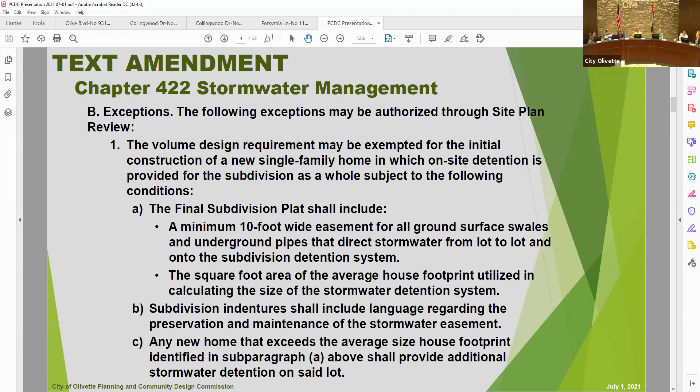Okay, any other questions or comments from the commission to our attendees? No? Anybody else have any further discussion on this item?

Carlos, any public comments related to this item? If there was anybody that would like to speak in regards to this petition application, if you can just show your hand and I'll bring you over to address the commission.

And Chairman, at this point, I don't see any. Okay, do I hear... I do have Councilman Waldman with it.

Mr. Chair, Brian Jokers, I thought I heard you ask a question that I'm not sure got answered. If you have house A and house B, and house A is under that measurable, and house B is over that measurable, can you still be okay because within 2 lots, those 2 lots together will equal a number, even though one's larger and one is smaller? Did I misunderstand what you were asking? No, that is what I was asking. If lot 1 was less than the number we set for the average, can that amount that it's less be used then on the next lot for the overage? I guess that was kind of my question. So yes, that was my question on that.

Go ahead, Karen. Missy, I think the commission's feeling on that is that keeping track of that for the total subdivision is going to be an administrative nightmare. We just have to consider each lot individually. If there's something that's slightly over, it's not going to be a big problem. If something's considerably over, then we're going to want to see some additional something to take care of that overflow. All right, so that was part of the answer to that question.

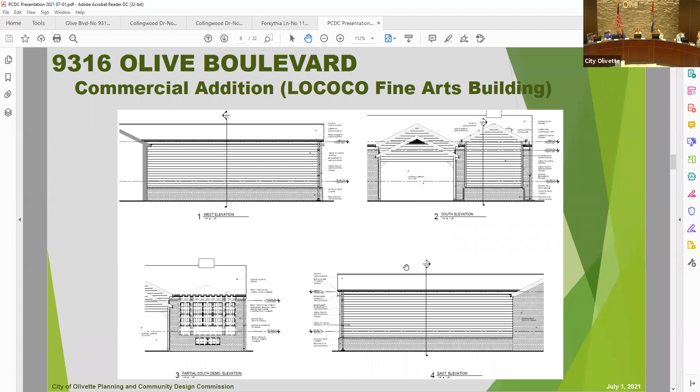You have the full sets of plans there. We've met with the assistant fire chief regarding access on the facility, along with the building inspector to talk about use and accessibility, and there are things they'll be working through in the permitting process. Outside of that, because the addition is behind a property fronting Olive and in the back of the building, staff is recommending approval as submitted. Be glad to answer any questions, and keep in mind the purpose is storage of artwork, so they're trying to minimize any exterior light from entering.

Is it going to be attached to the building? Yes, yes, so no gap there. No. Any other questions or comments?

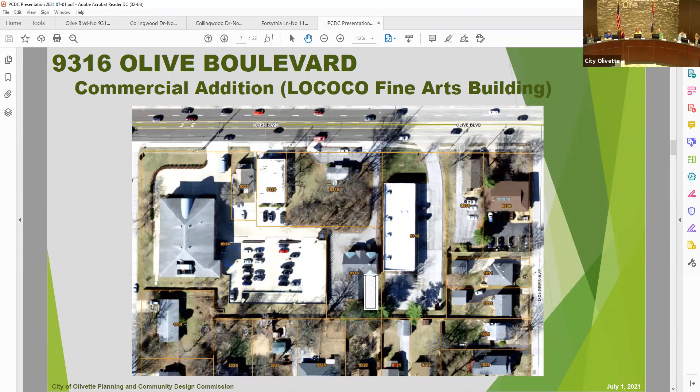I would like to motion to approve the petition for site plan, new design, and concept stormwater management plan review to authorize a 768 square foot addition as presented before the commission and noted in the memorandum from the Department of Planning and Development dated July 1, 2021, subject to staff conditions noted therein.

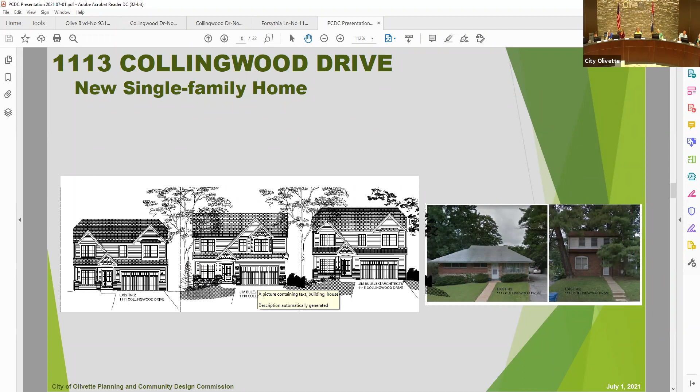Given the narrowness of these properties, the commission in the past has been flexible to allow or authorize a front entry garage as long as it's not the primary protruding portion of the home. You can see, given the property to the far left, the commission's found the design acceptable. Second is elevation articulation - looking at the side elevations, given the narrowness of the side yard setbacks, the first level on the left side elevation doesn't have any window articulation, but they try to break the building elevation with a band. Finally, if a home has less than 50% brick on a front elevation, staff has to bring that to the commission's attention for discussion and review, which this home does not require.

The last thing staff noted on this house is that there are contradictory elevations. The front elevation illustrates that the home was going to have a full hipped end, where the rear elevation shows that they're kind of clipped, and you'll see that in the next petition application. I think it was just a minor error - this one is more rectangular with corners, as opposed to having the corners cut off.

The petitioner did engage with the subdivision trustees. You have a letter of support from the trustee president, and also a letter from a resident expressing concern about the brick. Outside of that, staff doesn't have any other questions or comments. The home reflects traditionally what we've authorized or approved in the past, both for Collingwood and other narrow streets, including Cherry Tree and Harvest Lane.

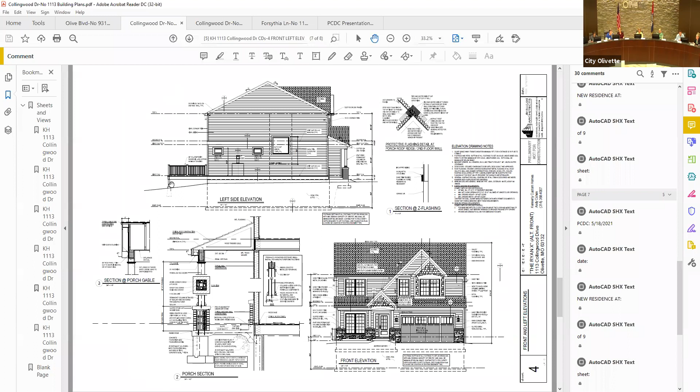Good question. Let me check real quickly if we have that information available topographically. It was kind of more pronounced when you had all the other residents' houses there. Bear with me. I think the elevation does rise as you're going down the street - the hilltop. Yes, so the elevations, the lowest elevations, and yes that is correct, because the house here at the end - there were some concerns about it being the house at the far end and the amount of future stormwater it could receive when we were doing the review on this home.

Then the only other comment I had is it just seems like all three of those houses look very similar. Are there different color changes between them, or anything that would make them a little bit more distinct from each other? I don't know if anybody else on the commission shares the same view.

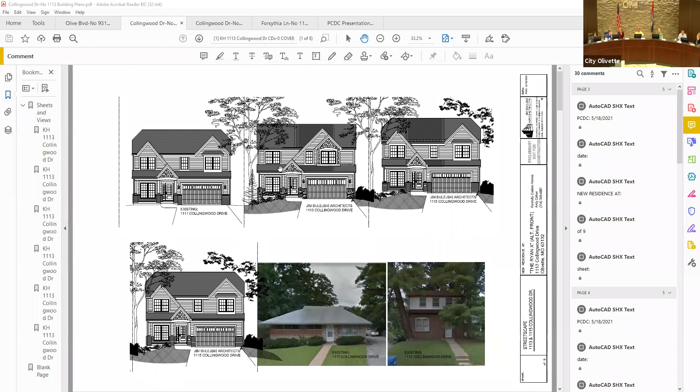I think it's a nice looking design, don't get me wrong, but I just think to have three right in a row like that, maybe it needs a little more variety.

Okay, bear with me one second. I believe you have, before you on your screens, the elevation of 111 or 1111 - that's the one at the farthest left, at the beginning of the street, second to this. There you go, sorry.

Do you know if there's any color variation between the two, or are they all using the exact same building materials? The overall material is the same. Regarding colors though, that's not information we generally take a look at in the detailed construction specs. The representative of the petitioner or one of the architects is on, and it's a question we can ask.

That'd be great. Right now, does anybody else on the commission have any questions for Carlos? Seeing none, Carlos, I think let's bring on the petitioner.

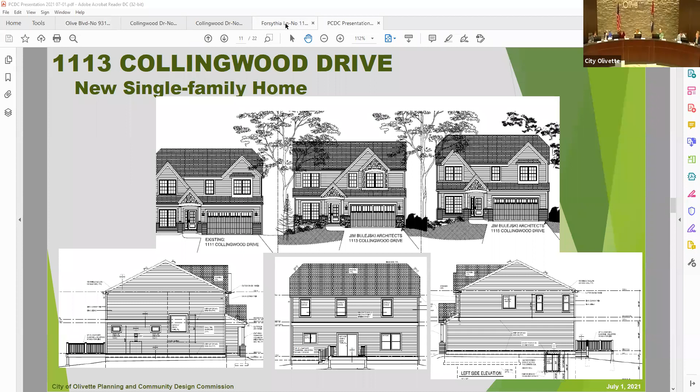Appreciate your time, Katie, thanks. Okay, we'll move on to item B, but we're also going to defer on that item because of the same issues as item A. Then we'll move on to item C, which is 11 Forsythia Lane. Mr. Chairman, I need to recuse myself on this issue. That sounds fine. Carol Wagner is recusing herself for this one, but this is a petition for a community design review for a new single-family home located at 11 Forsythia Lane.

All right, Chairman, are you set? Were we set? Yes, okay, she's good, ready. Good, good. Okay, so Carlos, are you ready?

I think I introduced it already, so if you're ready to go ahead with the report, that'd be great.

Chairman, this item was scheduled in our last commission meeting, but that was canceled. Given the excess time, we did meet with the petitioner and their architect. So the plans before you have been revised from those submitted at the June 17th meeting, which of course was not held.

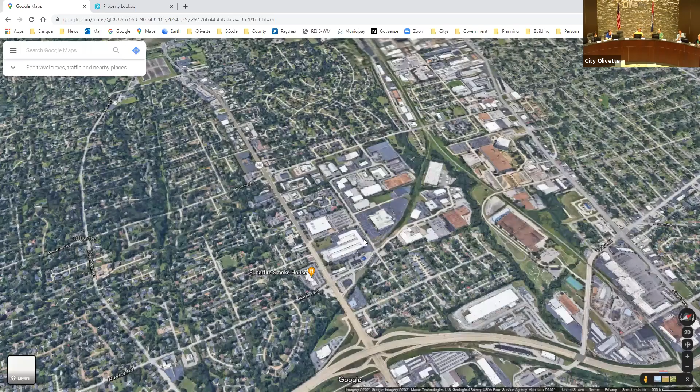There is a desire for it to be 80 feet versus, you know, 25 to 40. Seems like there was some adjustment made from this - why it desires to have such a far setback. Yeah, it's still significant, I think. I think it's a better improvement from where it was before, but I'm also a little concerned that it still stands out too far back. And the neighbors also, seems like multiple neighbors have expressed concern. Coming forward probably addresses some of it, but...

Real quickly, Mr. Spiegelglass, I think you should be able to see the little mouse pointer. This is the existing home, number 11. There's a tree that's identified in your site plan that's in the front, but back here are the 3 trees that you'll see, also reflected in their elevations here. Those 2 there, or in the renderings, I'm sorry.

I think there was a comment - if the owner had a comment that they didn't want to be on the footprint of the existing building, and concrete... I'm actually not sure I didn't quite understand it. It was something that they were afraid would potentially cause cracking in their foundation, water, really the ground. I didn't quite understand that myself.

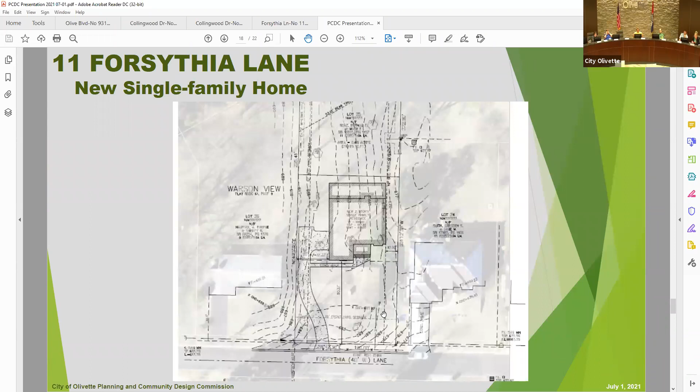That's pretty good, yeah. So you start running into issues with the driveway and whatnot being, in essence, part of the open foundation excavation, in my opinion—where if that's not the case, if you were to move this house forward, that's what you really need to look at. You can see how the driveway still allows us to get around the house.

If we move that house forward, let's call it 20 or 25 feet, part of that driveway is now over what is currently kind of an excavated area. So we're asking for concrete issues with that drive apron, which would be a bigger concern to me than maybe a cracking foundation.

But the cracking foundation—once the old house is uprooted, we'd have to do some soils testing to see what kind of bearing capacity we have, and then still engineer the soil compaction as we fill that back in. We've done so many tear-downs, and yeah, this happens all the time.

I'm not quite understanding. Tim, do you have any thoughts on this?

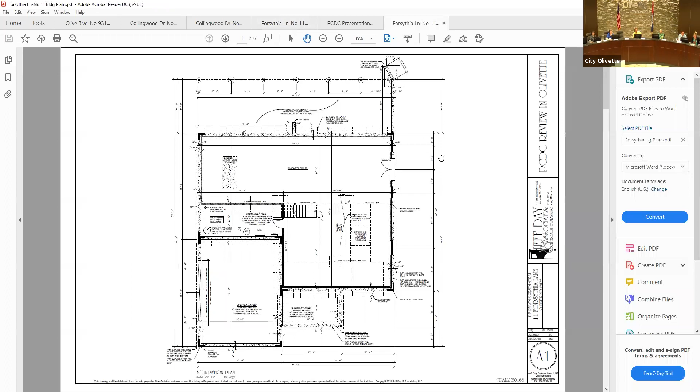There's the basement floor plan. Okay, if you could show the first floor. Okay, you guys see where the garage is located? Yes. Okay, so as we move the whole house forward, that garage is going to be over what is currently basement on the existing house.

So there's either a whole lot of backfill, which if not compacted correctly, these things start settling, or he's forced to buy pre-stressed structural hollow core slabs and have a basement under his garage, which adds, currently with COVID pricing, somewhere in the range of $30,000 to $40,000.

And so we would have to engineer the soil underneath it, as well as the engineered soil outside of that at the apron, because the garage and the drive apron falls over the basement.

So Carlos, if you wouldn't mind going back to the translucent site plan. Imagine taking that footprint, moving it forward 20 or 25 feet. And now all of that is over what is currently basement area. So it starts to exacerbate what we're trying to do, and it makes the cost of the garage pretty excessive, and the driveway at that point as well.

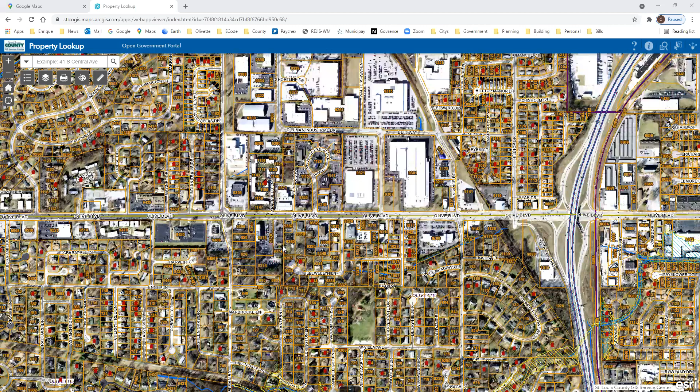One of the beautiful aspects of our subdivision design is the large area of green space we all enjoy at the rear of our properties. The subdivision indentures help keep this view in place by limiting the height of any fences within the subdivision. When I sit on my back deck, I have the pleasure of seeing a park-like area of uninterrupted green space. It is in large part what makes our neighborhood one of the prettiest in the area, in my opinion. This is not protected common ground, nor is it a public park, but it has survived since the subdivision was built in the early 1950s, because each of us has respected our neighbors and purposefully not constructed sheds to block our neighbor's view or put in fencing over 3 feet.

This new home as proposed would clearly be an obstruction for almost the entire subdivision. The house is still set back so far, it does not come close to the frontages of the other homes on the street. It does not respect anything about our neighborhood design and would be very harmful to all of us on this side of Forsythia. This is a lot of damage to a lot of homes.

As you know, I'm a professional planning consultant with 30 years of experience and have served on the city's planning commission for about 30 years. I have spent most of my career working on redevelopment projects. In all that time, working with engineers and architects, I have never heard any of them say they could not place a structure on or near the footprint of the building that was being torn down.

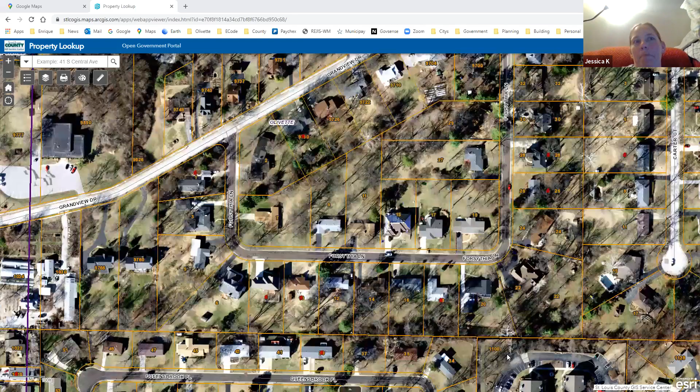Also, when I was looking at the plans Carlos brought up of the lot lines we had, of the two lot lines on the other side, David's backs up to the back 100 feet, but the other two are set back from the front 100 feet. If we build this house at this setback, number 15 and number 17 would actually have great difficulty moving back any further if they were to tear it down.

When we move it back, it really does affect the setback and the feeling of the street, because 15, 17, and 19 don't have much room to push their houses back. I know number 11 does, and number 9 could maybe move back a little, but that would set a precedent for what we have. So even an 80-foot setback will still significantly impact the view of our block.

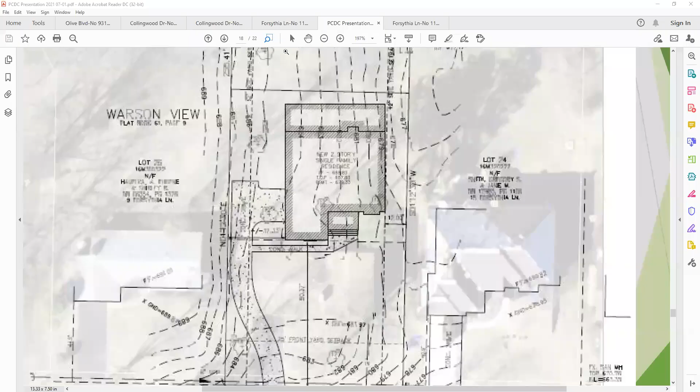That really becomes a redesign, and if you guys want to take time to look at the floor plan design, I think you'll see the flow and function makes the most sense. How we have it, we didn't want a front entry garage because that's not desirable, even though there's a slew of them through the neighborhood. And the back of the house, we really wanted to capture the park-like setting. In our mind,

if you look at the back of the house, this is a fairly common layout, right? People have a big great room open to the kitchen, and they usually sneak a little breakfast room table in between the two. As Noah mentioned, his family lives in the neighborhood and they all get together regularly — that's why you see such a big dining room. And you want to capture that park-like setting. If I were the neighbors who spoke tonight, I wouldn't want to sit in my backyard and see a garage at the back of Noah's house, especially as they mentioned. They're right — these are beautiful backyards, a series of trees, grass and whatnot, so it does feel park-like back there.

We didn't necessarily feel it was shoved so far back that it would break that feeling. So, to forfeit the view out back to put the garage in the back, I think would be a foolish move — certainly not the best end use of the lot, and that has obviously been verbalized by all the folks who spoke tonight.

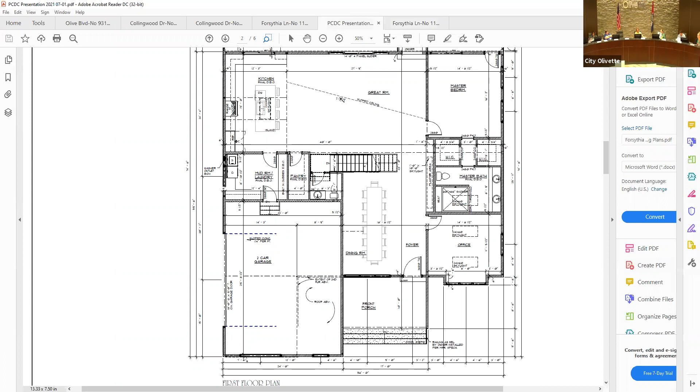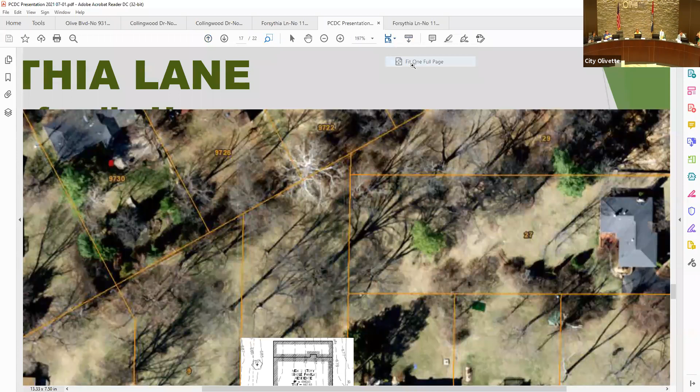I think your comments make sense, and I see some heads nodding here, so we understand. But I'd suggest maybe you guys have some discussions with the neighborhood association — maybe see if there's something, because it does sound like Mr. Palatnik really wants to be a good neighbor and work with everybody there. So maybe you can see if there's a good compromise to balance the needs of everybody.

Yeah, and I think that's a good idea. To Noah's point, I didn't know there was a neighborhood association either. We were going with city codes, and everything we're doing is inside of city code, obviously.

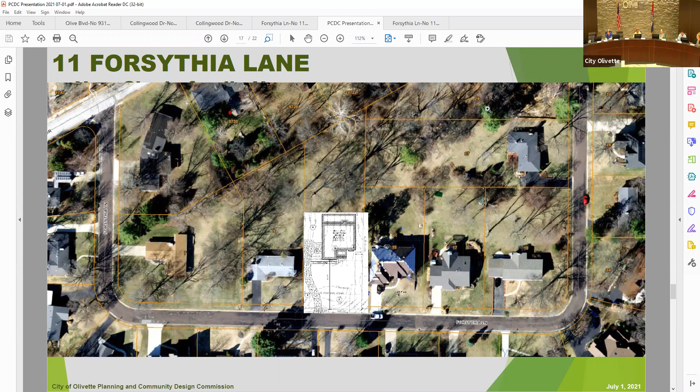Can we still review the design of the exterior or comment or approval? I don't want to speak on behalf of everybody else, but I'm seeing heads nod that the exterior is fine and everybody kind of likes it, quite frankly. We could take a poll, without approving it, if that would be acceptable.

Tim, as far as the exterior design? Absolutely, I approve. It's gorgeous. Brian? No concerns, and the neighbors even commented that they liked it. I like your idea of getting together.

What was the question? About the exterior design, if you had any issues or concerns with it. I did not either. I think it's very unique. It's nice, very interesting, and I kind of like it. The only thing I was... no, I'm fine.

So I would say maybe if we can work out, if you can speak to the neighborhood association, work out a good idea for that setback that balances with everybody. I think that would be the best thing.

So Jeff, or Mr. Palatnik, I'm not sure if you're still on. Both on. I think Noah is more than happy to meet with everybody, and I'm certainly willing to join him and have those conversations. Great, good. Yes, I'm definitely willing and wanting to meet with my neighbors.

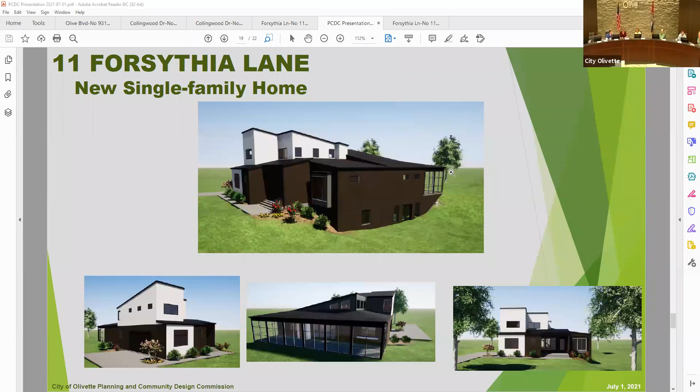Just a couple of items regarding the next scheduled council meetings. They'll have a work session July 6th, and then their regular meetings will be hosted on July 13th and July 27th. The city council has been meeting in person over the past month, beginning in July, specifically with the July 13th meeting, they will now be allowing the public to attend their meetings.

So they'll be doing the meetings hybrid, in person and public, and also through continued use of Zoom and recording of these meetings. I'll let the council liaison go into more specifics regarding other policies for people who attend those meetings and what would be required.

There will also be a coffee with the mayor scheduled, I don't have the date, but I believe it will be July 14th, in which Mayor Clark will have as their guest the Great Rivers Greenway to talk about the Centennial Greenway, and I believe Director Mann of the Finance Department to update the public on our recently adopted budget.

For the commission, our next scheduled meeting is on the 15th. Again, it will be an in-person meeting, but I don't believe we'll be prepared yet to have public in place. We'll have our August meetings scheduled on the 5th and the 19th. And just a heads up that in September, the first meeting is on the 2nd, and the second meeting is on the 16th, which is the last day of Yom Kippur. So if we need to reschedule or have any considerations for that observation, let me know so I can let the petitioners know in advance.